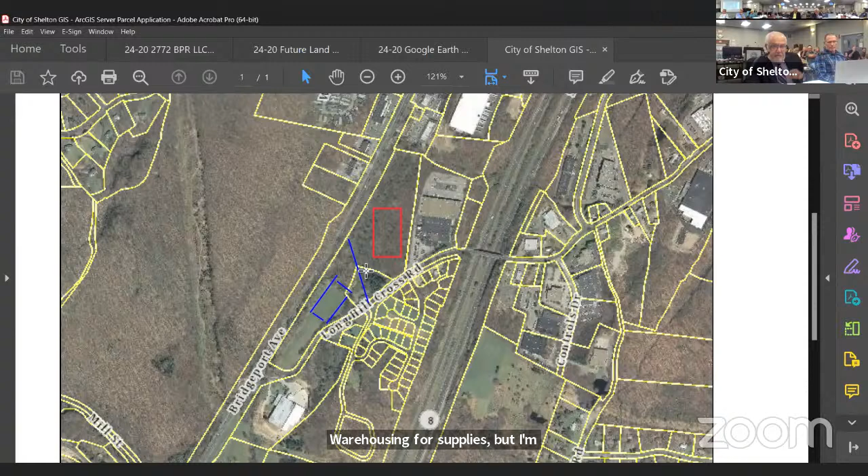That is in LIP, but that's by special exception. This property could be subject, by special exception, to one of the things that people are building, which is high-tech, high bay warehousing for supplies. But I'm not even going there because I'm just focusing on site plans for one specific reason.

Which is people are saying, well, why the heck did he put the BPR suit in? I put the BPR suit in because this was a very controversial case in North Branford that involved a propane storage area. The people objected to it, and they raised a lot of issues about the neighborhood, about the traffic in the neighborhood, and about the land values.

And it was approved because the commission had made it a site plan, which meant it was a matter of right as long as it complied. So I call your attention, and I'm going to quickly go through it, that the language in the headnotes of this case are very enlightening.

When reviewing a site plan development application for a permitted use as of right, the planning commission acts as an administrative agency. When a planning commission undertakes consideration of a site plan application, it has no independent discretion beyond determining whether the plan complies with the site plan regulations.

And then it says the commission, when it's unable to deny it because of the claims of traffic, the claims of the impact on the neighborhoods, because when the Planning and Zoning Commission made it a site plan as a matter of right, it was a determination that the infrastructure in the area and the use is appropriate.

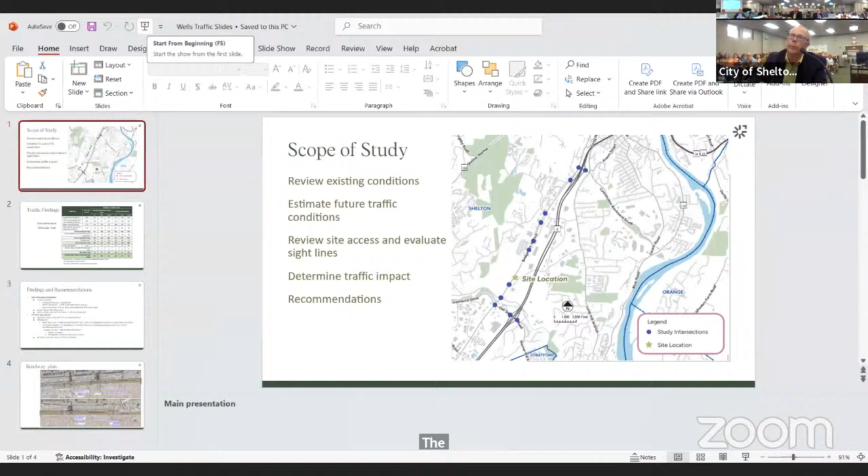If you go to the next one, the next slide. Dominic, if you can get to it. Next slide, on my screen. There we go, there it is.

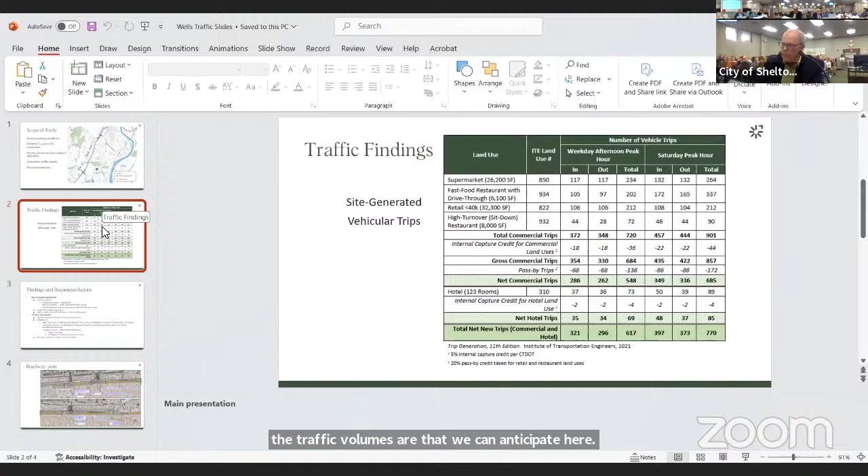This gives us a feeling for what the traffic volumes are that we could anticipate here. There's a lot of numbers up here, but essentially we took each of the land uses individually. We used the Institute of Transportation Engineers statistics for each land use, added up all of those land uses, and for the commercial land uses we take an internal capture, which means somebody going to the restaurant might already be at the hotel, for example, resulting in a small decrease in traffic volumes.

Then a larger decrease is the pass-by trips. Pass-by trips are, for instance, if you're on your way home from work and you stop into the supermarket, then continue on your way home. That's a new trip to that particular driveway, but not a new trip at the other intersections because you'd be going through those intersections anyway. So we make the adjustment for pass-by trips. The hotel doesn't have the pass-by component, so we did that individually.

At the end of the day, we're estimating there'll be 617 trips in an afternoon peak hour, in and out, approximately half and half. Likewise, on Saturdays during the midday peak hour, early afternoon, we expect that number would be higher, about 770 trips. That's our total net new trips that would need to be accommodated on the area roadways.

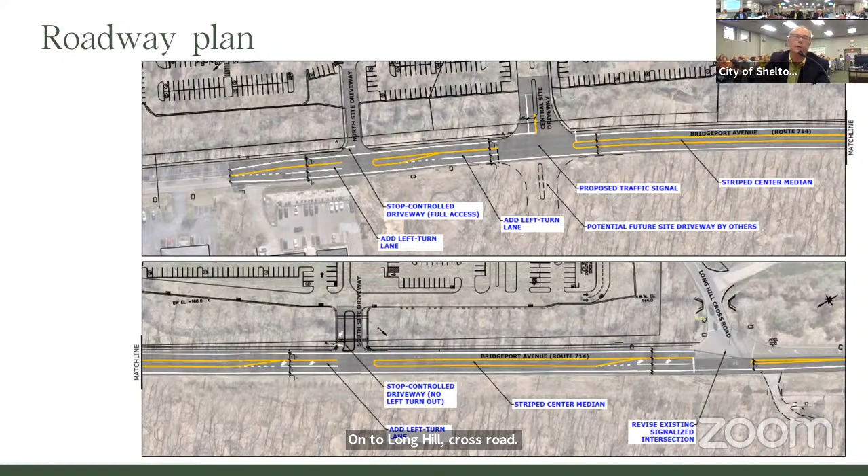So, Dominic, if you can go back one slide. It's a little bit of chicken and egg there. So that's what we're expecting at the site driveways. In general, all those driveways will have good levels of service, and again, as I mentioned, we'll be adding southbound left turn lanes at each of the 3 driveways.

In terms of off-site or non-site frontage mitigation, out of the intersections that we looked at, we found that there's some impacts that should be addressed at 4 of the other intersections. Well, 5, including Long Hill Crossroad, which I already talked about. So the first bullet is that left turn lane onto Long Hill Crossroad off of Bridgeport Avenue southbound.

The second thing was a lane use change at the intersection of Bridgeport Avenue with exit 11, aka exit 13, formerly known as FKA, FKA exit 13. At that location, we did find that our traffic was diminishing the level of service there, and we're recommending a lane use change there.

What we found is the right turn lane onto the ramp is often starved, meaning it's underutilized, and there is a 2-lane acceptance on the other side of the intersection. So our recommendation is to make the northbound approach there a through lane and a through right turn lane, instead of as it operates today with a left turn lane, a through lane, and a dedicated right turn lane. So we'll get dual use out of that right turn lane.

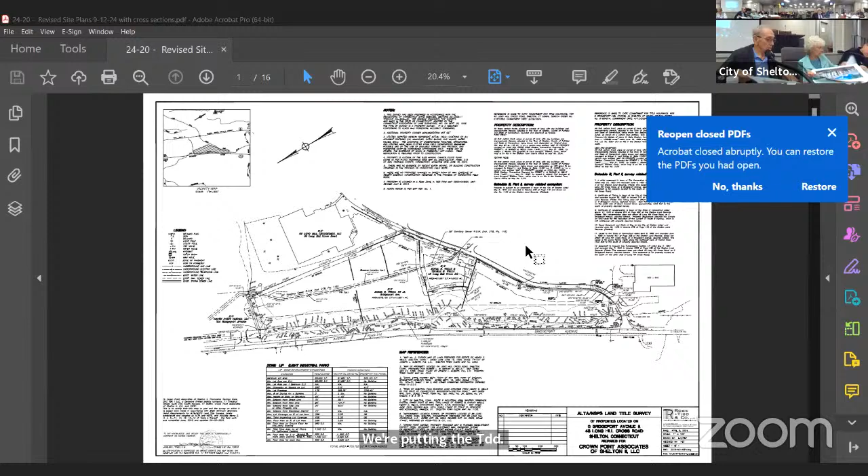I see where it says relocate sewer line and easement—what was that wall, is it all the way to the back? No, the wall is in front of where that sewer line is shown. It's the back of the development, basically. That's the retaining wall, is it that black line? Oh, okay, correct.

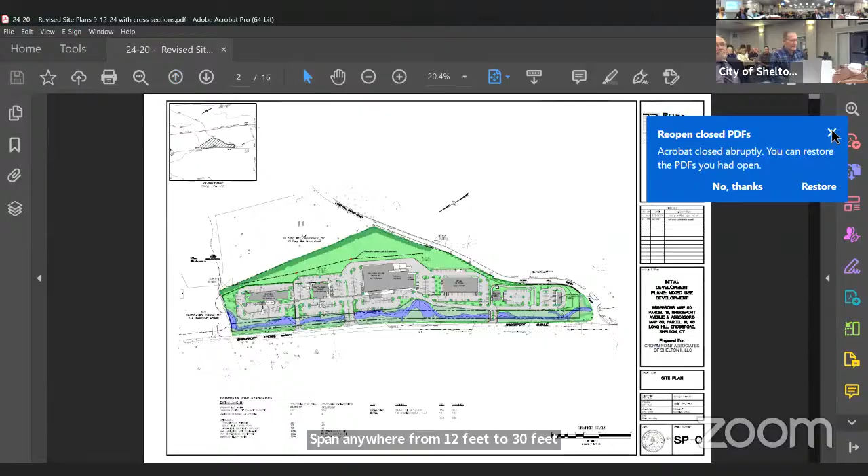So because there's a big grade change, we are having to create a plateau. We're going to come in on the elevation of Bridgeport Avenue, span across going uphill to a higher elevation on the other side of the brook, then go back essentially at 5% to create a pad for this development that will give us retaining walls at the back, which will span anywhere from 12 to 30 feet in height. So compared to what's existing behind the Y right now, what's the perspective? Creek-wise, probably 25, 28 feet. Okay, so it's a similar nature of height.

But it varies—as you come down Long Hill Crossroads, it eventually goes to zero, and then actually there's a situation above at the corner. So what we end up having to do is create a gravity retaining wall along the brook to create our parking for those pad sites. And then to the rear of the development, it will be either a rock face or a gravity retaining wall, depending on the condition of the rock.

What's gravity? I don't know what that is. Large masonry blocks that are stacked, with filter fabric that runs back into the grade to hold them, keep them stable. So are they sloped? They're straight, battered back at a fairly slight angle. Okay, so gravity is keeping them—that's why it's called a gravity wall. So are you taking product out and then putting product back in, in other words, making it level? We're making it relatively level.

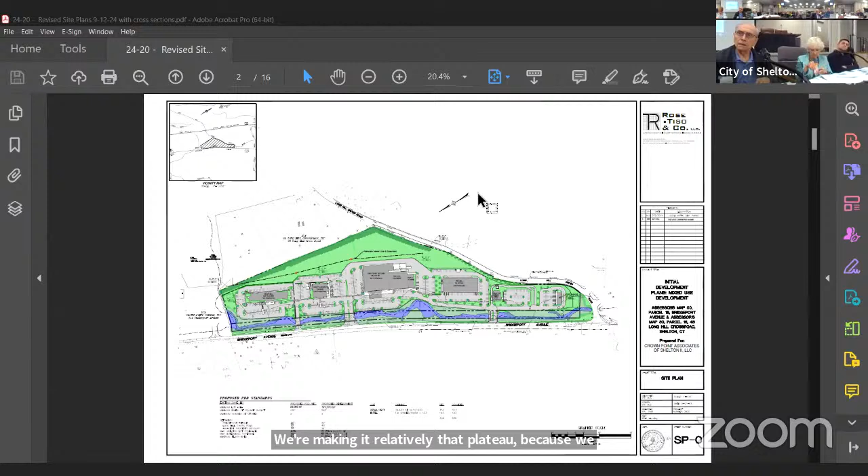That plateau—we can slope it 5% across parking, where driveways can be more than that, but it has to be relatively level. But the problem is, with the challenge of the site, is that from the north end down to the south end of the site, there's a significant grade change down. From what to what?

You want Mr. Silva to take care of that when he's up? Yeah. Okay, but we'll hold on to that right now. It's, you're up in the north end at 190, and down at the south end at 160, so you're 30 feet down—you've got 2,200 lineal feet to go 30 feet. But you're also fighting the fact that you want parking level in front of the store, and the parking lot can only change like 5%, so you have to balance that.

Okay, regarding the aesthetics of this gravity retaining wall, is the appearance of it what they've put up so far at McDonald's, in the corner there?

I haven't seen that one. You can get different faces on the gravity retaining wall. They can be made to look like masonry blocks, or brick. There's all kinds of faces you could use. And there's most likely some landscaping in front of it, just softening.

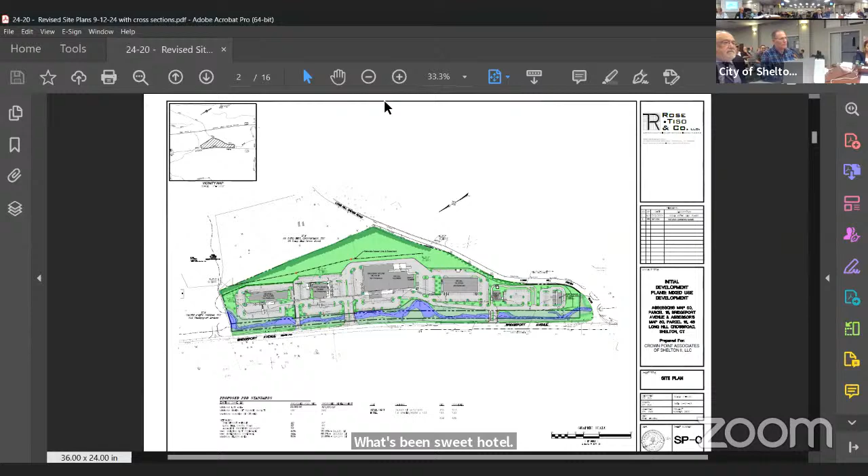Yeah, I'm trying to get it up a little bigger. So that is access off of the most northerly bridge. Turn left into the hotel. Then to the right-hand side as you come in, there will be a Texas Roadhouse Restaurant.

Which is a little less than 8,000 square feet and has 152 parking spaces. Then that brings us to the center entrance to the center. On the right-hand side of that, there's going to be a grocery facility, about 25,000 square feet, and adjacent to that about 16,600 square feet of retail space right next to it, servicing that with about 187 parking spaces.

Is this a particular grocery? There is discussions with a particular grocery. Okay, I mean some that I know have huge demand of parking. Yeah, that would be a concern.

Backing up just a bit, are you going to be able to give us some elevation drawings? I have renderings here. Yeah, we have renderings. No, I mean of the site, these retaining walls. You can actually see in some of the renderings where the retaining wall is behind. I haven't done one yet that shows the one along Spring because we haven't done the vacation.

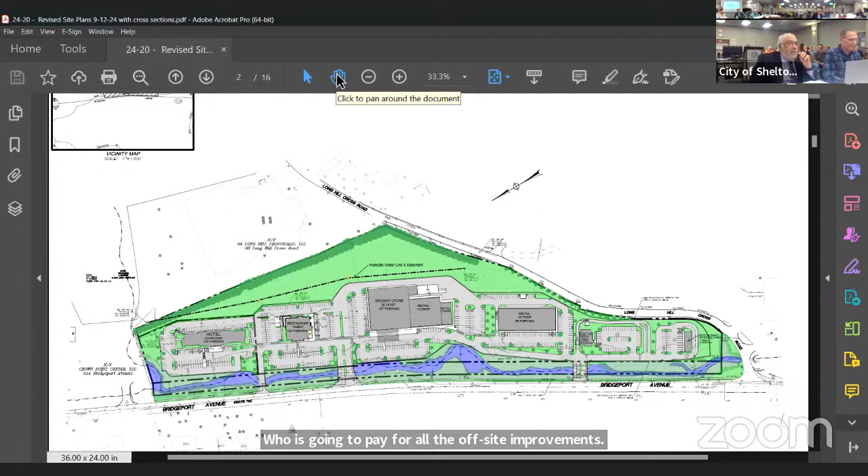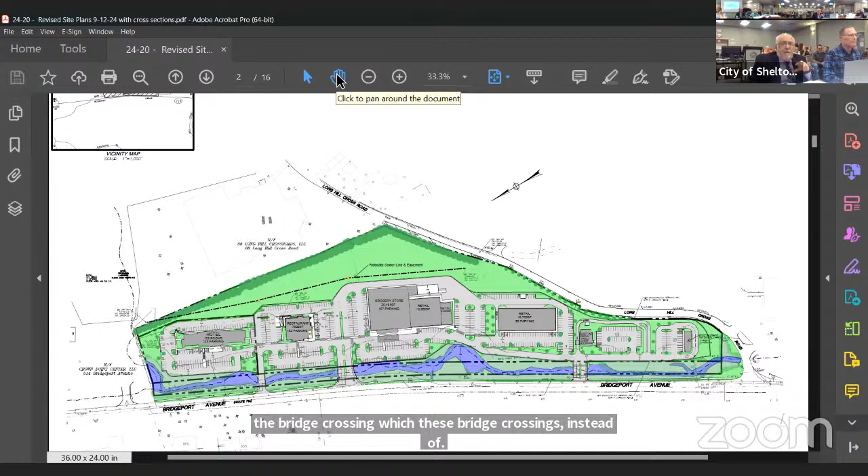Because of what you asked at the end of Dave Sullivan's presentation, which was who's going to pay for all the off-site improvements? It's the developer. So when you look at this site and the issues with it, you have a retaining wall in the back, a wall in the front as you go in, and the issues that have to be dealt with of the bridge crossings. It would be less expensive to drop a culvert in, but the wetlands don't want culverts, they want bridges. So all of these things are extremely expensive. The public often says, well, all the developer wants to do is make money. I've been doing this, at least the land use portion of it, for almost 40 years now, and I have never represented a developer who told me he or she did not want to make money.

That's what they're in it for. They're doing that. The problem is that they're not in it to launder drug money. They're in it to make appropriate money and pay for the costs, the improvements, and the site development.

When you're on Bridgeport Avenue, I tell everybody that walks into my office, you have to have a conversation with the person who sat next to me, Dave Sullivan, and find out what you're going to have to do offsite, because you have to pay for it. And when I was first told what a traffic light cost, it was mind boggling.

So in other words, the developer sets it up looking at what the potential tenancies are. The hotel is obviously not a tenancy, the hotel actually buys the property, because as you're familiar with the other ones you've approved, the hotels buy it. The rest of the rental income needs to support the development.

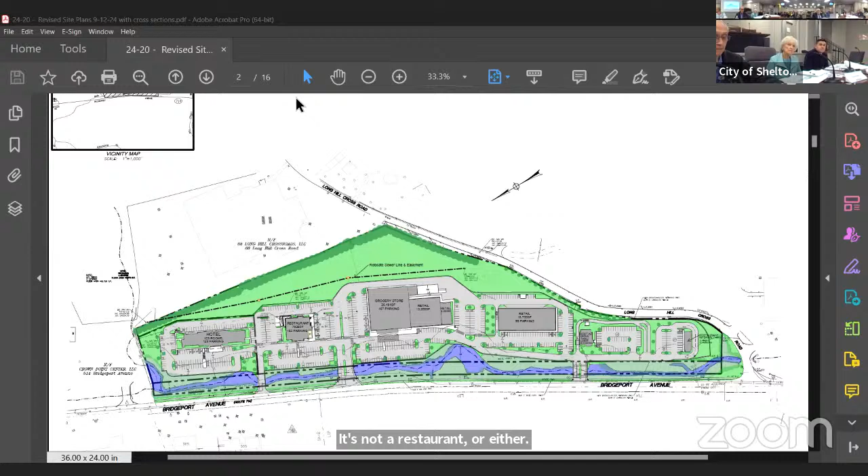But it's not a restaurant or eatery - it is an eatery, food related. So three drive-throughs. Yeah, the one restaurant that has the drive-through with the 48 spaces hasn't been assigned yet. Nobody's leased it or talked about leasing it.

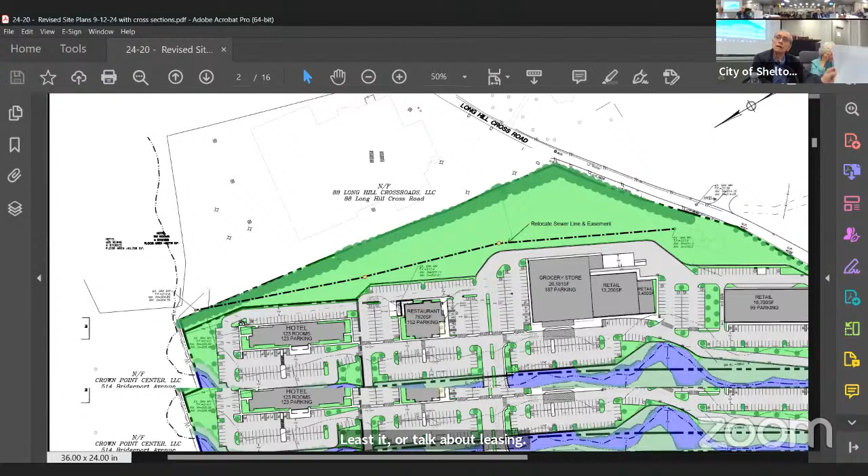People love the Texas drive-through. Would Roadhouse have a pickup area? Yes, they have pickup spots, such as Outback. Okay, yes.

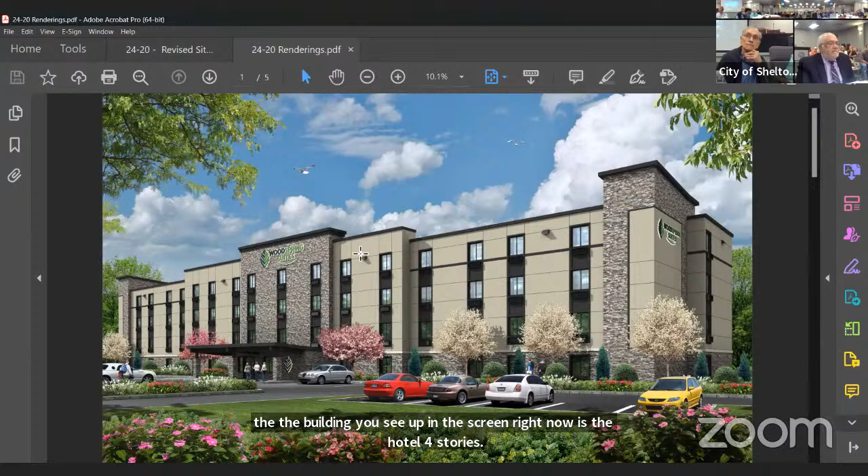So the building you see on the screen right now is the hotel. It's 4 stories, a WoodSpring Suites Hotel. What we've done is put a cultured stone base, front entrance is cultured stone with a canopy, porte cochere. On either end you've got stairways, also cultured stone, facing the street. Then it's EIFS on the 4 stories above, with black windows and black metal panels, where the windows are for each of the hotel rooms. It's a really standard hotel layout, but I think when you see the rest of it, you'll see that it all fits together to some degree.

Are you going over the actual layouts later on? I can, but the hotel is fairly straightforward, it's 123 rooms. There's no large gathering spaces in it, other than lounge areas. So unlike the Courtyard by Marriott down the street, no indoor pool, no ballroom, no meeting room, none of those things. It's just strictly a bedroom kind of setup, suite type, like extended stay type.

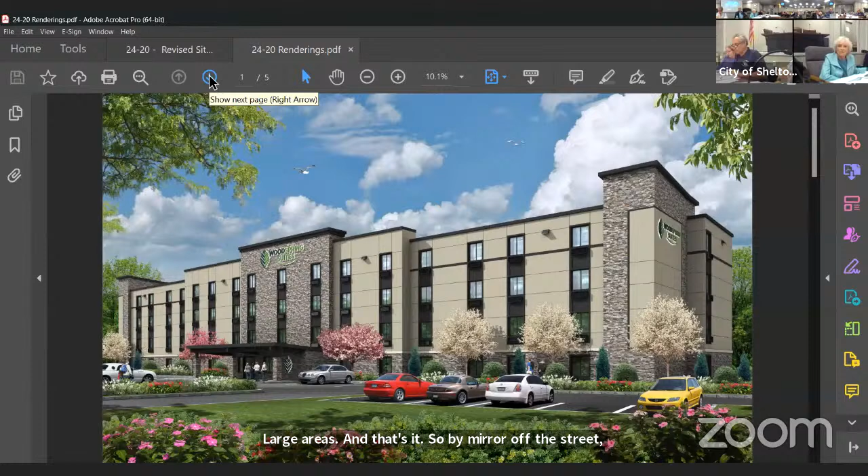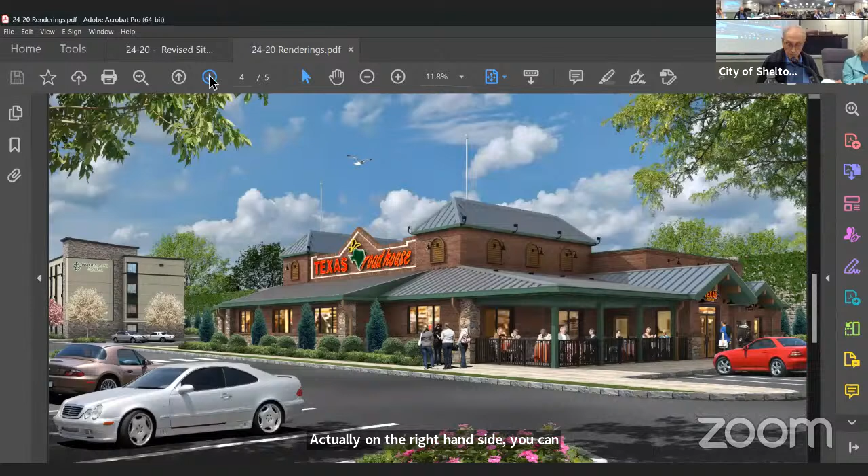That's good. Texas. Very nice. So we keep going. Okay. Next one is the Texas Roadhouse. You can see the hotel on the left-hand side. Actually, on the right-hand side, you can see in part of the rendering the gravity retaining wall above, with the road here. Yeah, see that?

So it's the height of the main roof of the building there. Texas Roadhouse is one of their prototypes. We changed it to some degree by putting all brick on the outside, didn't want to go with the barn board plank, and using the metal roofs, which is their pretty typical standard. It's got a patio area out front by that entrance, which is on the side. Everybody's seen what Texas Roadhouse is, I'm sure.

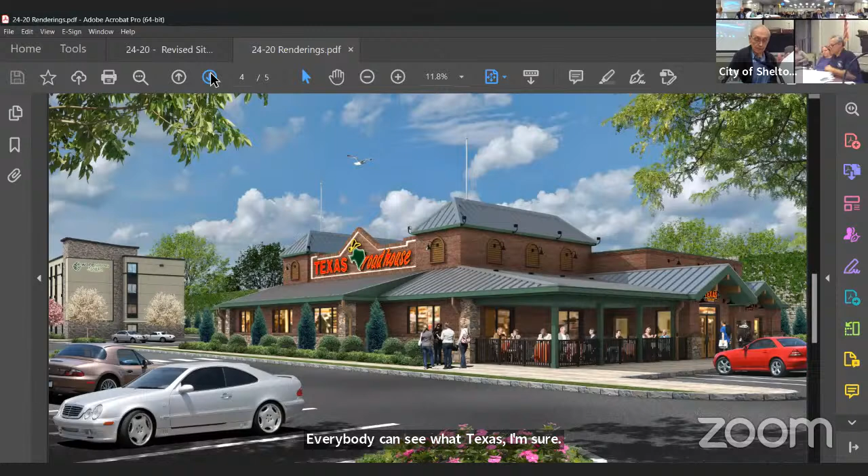Okay, the next one, groceries? The grocer building, where we have the 26,000 square foot grocer on the right-hand side, and on the left-hand side the 13,200 square foot of retail space adjacent to that. For the grocer, we're using a black metal colonnade that runs to protect people as they're walking out with their carts. On the right-hand side you've got EFIS columns, the same columns we're using in the retail, so we're tying those buildings together, so it works fairly well. Gives them their identity with the wood portion—that's the identity of the tenant that's coming in.

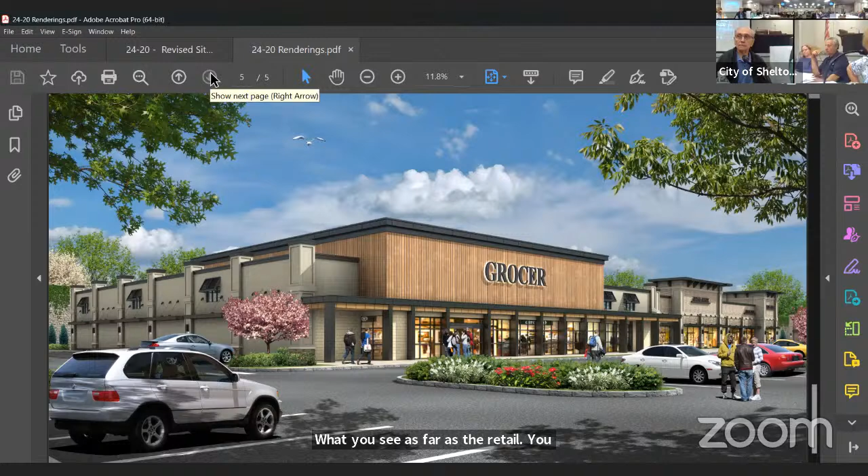Using earth tones throughout? Yes, right. So what you see as far as the retail, you see these EFIS columns, you see the brick inlays above the windows, and you see the black awnings hung below that, and towers that offset the higher portions. They're done in metal.

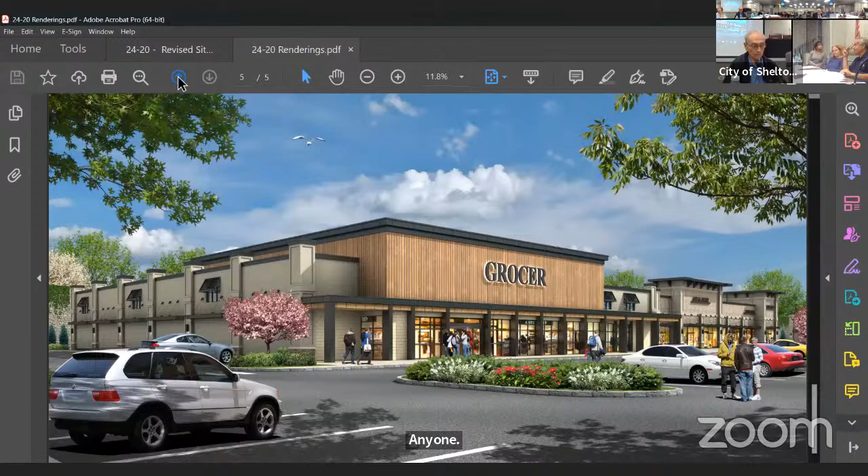Go to the next slide. The retail building that's by itself, the 18,700 square foot retail building, is done in the same motif as the other retail. You've got stone on the base to protect the bottom of the columns, EFIS columns above that, and then brick in between the EFIS columns, black window mullions and black awnings, and black towers that offset and provide some vertical breakup of the length of the building. You're also seeing in this rendering on the right-hand side the gravity stone retaining wall.

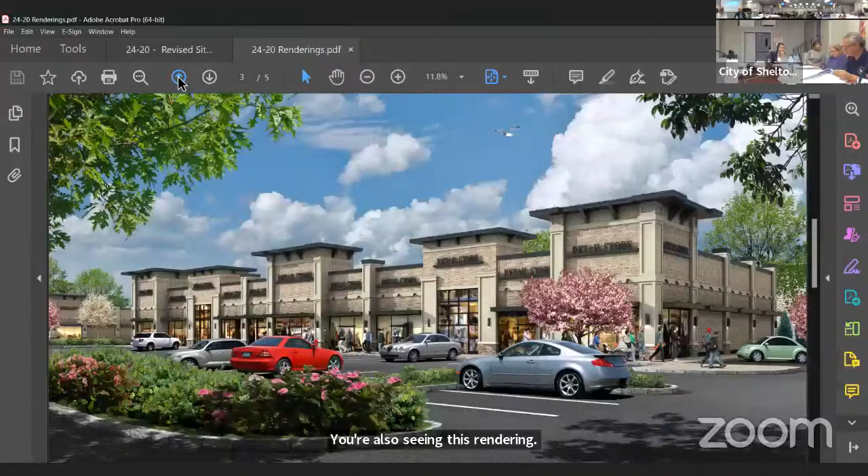And the last one, Dairy Queen. What you're seeing here is the Dairy Queen face that's facing Bridgeport Avenue. This is their typical prototypical building, using EFIS on most of the surfaces, except they have these metal awnings, little pop-out awnings above the windows. Where the DQ sign is, on the side facing Bridgeport Avenue, that's all metal panels, so it's a different material that stands out where the signage is. The signage is only on this particular side, over the front door—nothing around the corner.

That would face the parking lot. I do explain to the tenants that they have to go before the sign subcommittee. Correct, yes, I know that. Their typical sign is only over the entrance that's off of the patio and the entrance on the main entrance. We do appreciate that, but sometimes things slip through the cracks, and not everybody listens to me. Outside of the marketplace where Big Y is, there's a sign saying coming soon for Buffalo Wild Wings. They didn't approach us to get permission to put it up. So we try to make sure that everybody dots their i's and crosses their t's.

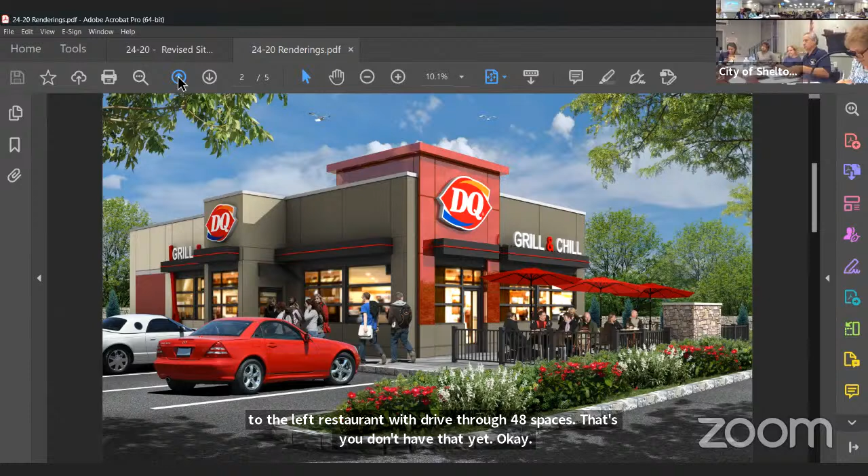All right, very good. Anything else? No, I'd like to let Manny Silva go through the site.

You guys want me to sit down or you want me to stand up like I usually do? Up to you. Please, that's right, in front of a microphone. Yeah, that's fine, we'll grab this one, right? I don't know about the other one. All right, can I steal your mouse though? Yeah, I already did.

Good evening, Manny Silva from Rose Tiso & Company, licensed civil engineer for Rose Tiso & Company at 35 Redwood Avenue, Fairfield, Connecticut, representing the applicant.

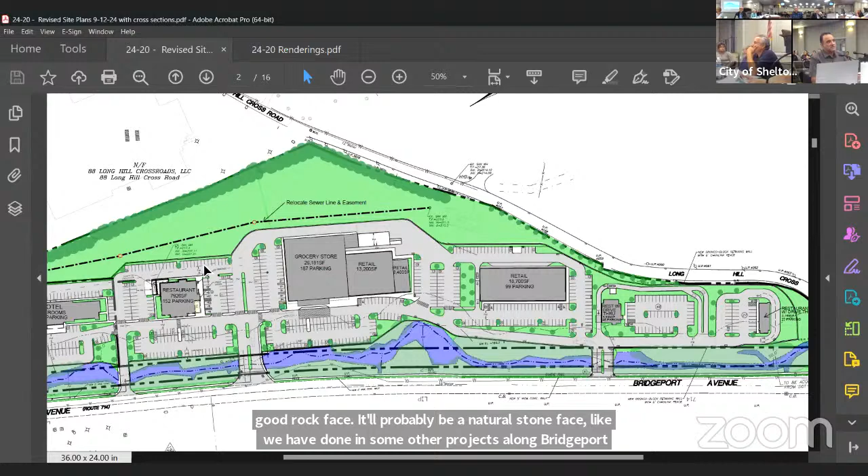To go through the overview of the site again, the site itself will have a small retaining wall along the brook here, which is going to be similar to what is at Fountain Square, a stone-faced concrete wall. And then similar to the marketplace where Big Y is, the rear wall, is how that's going to be. If we run into a good rock face, it'll probably be a natural stone face like we have done in some other projects along Bridgeport Avenue.

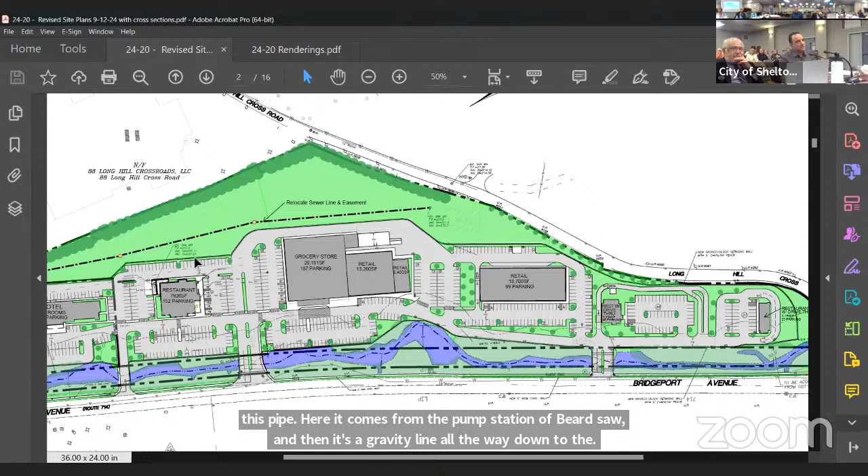But if that does not pan out and that's mostly soil, it will be a similar retaining wall to what's behind Big Y. We have, again, a sewer relocation here, and then this pipe comes from the pump station at Beard Saw, and it's a gravity line all the way down to the pump station in front of Crown Point, and we'll be relocating that a little further back. Again, just to reiterate, this line here that follows the retaining wall is the limit of the PDD. So only this black line where the retaining wall is towards Bridgeport Avenue will be PDD. The rest of it will remain LIP.

The site, as Pat said - it'll remain LIP or something, right? Yes, okay. And again, as Pat and Attorney Thomas illustrated, there's going to be 3 bridges crossing the brook into Bridgeport Avenue.

There is no access onto Long Hill Crossroads. In fact, Long Hill Crossroads will sit a little higher than the site itself, so I have a couple of sections that will show that even if there were no trees whatsoever in this upper area - which we are going to have buffered and landscaped on both the backside - but if there were no trees at all, you could see from Hawks Ridge or Long Hill Crossroads basically the top of the roofs.

But that's not preferable - that would not be preferable. Right, so that's why we're going to have landscaping and buffering along Long Hill Crossroads, so that you won't be able to see the top of the roofs.

The bridges themselves are conspan bridges, which are like precast half-moons that will span the brook without actually impacting the brook itself, so there'll be free flow underneath it. The footings and everything will be outside of the brook area.

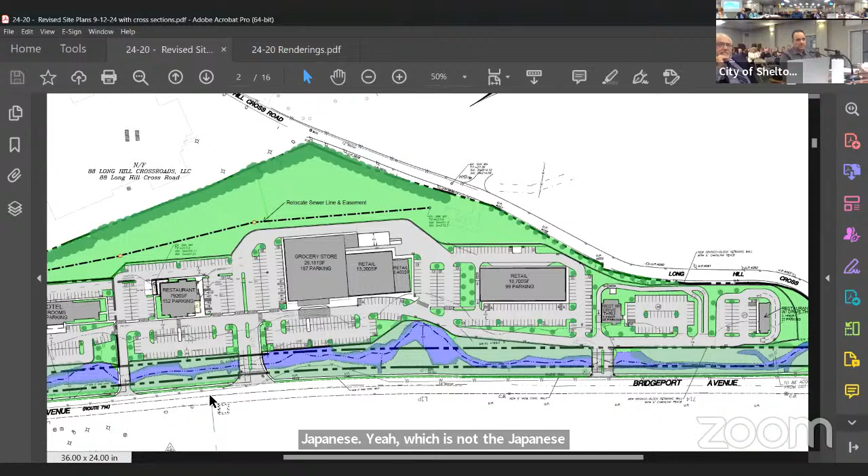Then you'll see these side pieces of dark concrete where the sidewalk and guardrails will be. It's very similar to what was built in front of what was historically called Madison's, now the Japanese steakhouse. That's exactly the type of bridge we'll be putting in, to reduce the impact to the brook and have free flow for any kind of animal life or water flow through the brook.

As Pat said, the site generally slopes from the top of the page here down to the brook below. It's a very steep grade. It doesn't look it from Bridgeport Avenue, but if you were actually on site, you'd see it's a pretty good climb to get up there. The reason it's kind of an optical illusion is because part of it is cleared, where there was a meadow on the right-hand side, and the meadow makes you think it's flat, but it's not really flat.

In fact, Bridgeport Avenue itself has a pretty good pitch going from north to south, diving down quite a bit. So we have to create plateaus - the hotel site, then about 5% down to the next site, then 5% down again, with a flat area for each site. So you'll see it step down with the natural grade.

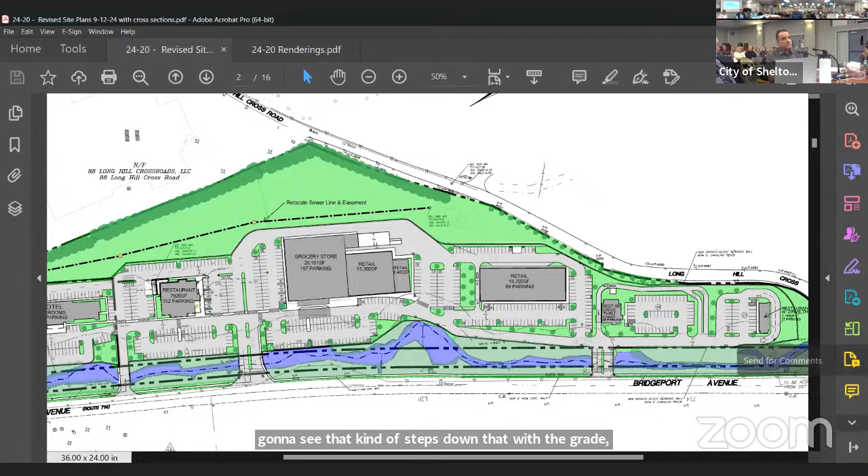That's fine. Here again, we have that area that's going to remain LIP - I should write that - and the area that's going to be PDD is down there. I want to clarify one thing: the PDD area does not include, at this point, the 50-foot state property, because I couldn't include it. If the state property is sold to us, I'd have to come back to amend the boundary of the PDD. Right now, all of it is typical right of way. I just wanted to make sure you understood that.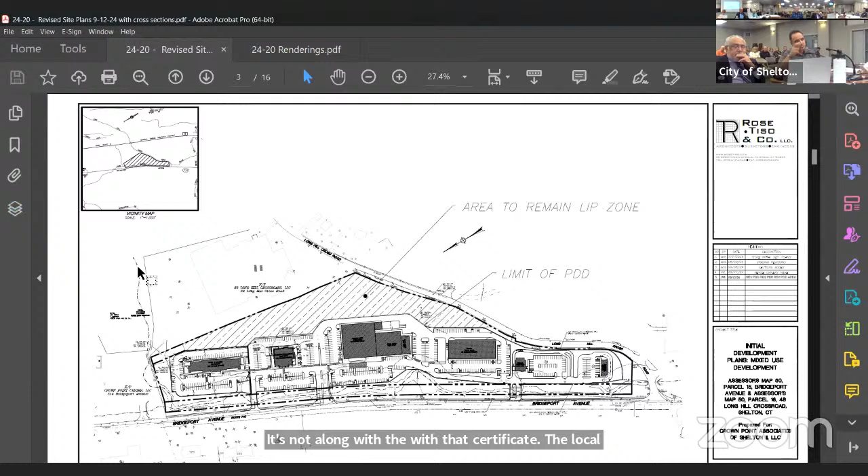So with the state right of way, if we acquire that property, it's just an encroachment permit on the state right of way to do the improvements we're asking for. Along with that OSTA certificate, the local district will review the encroachment, meaning creating driveways onto the state property, which we'd be allowed to do, and then removed.

Well, it's Crown Point the same way, isn't it? Correct, all the sites on Bridgeport Avenue are the same - they all have to have a DOT approval with an encroachment permit to access the state right of way or state road from our property. We don't see any issue with these three proposed bridges onto Bridgeport Avenue because it doesn't have a non-access line or anything like that, so the state should allow it, along with Dave's help.

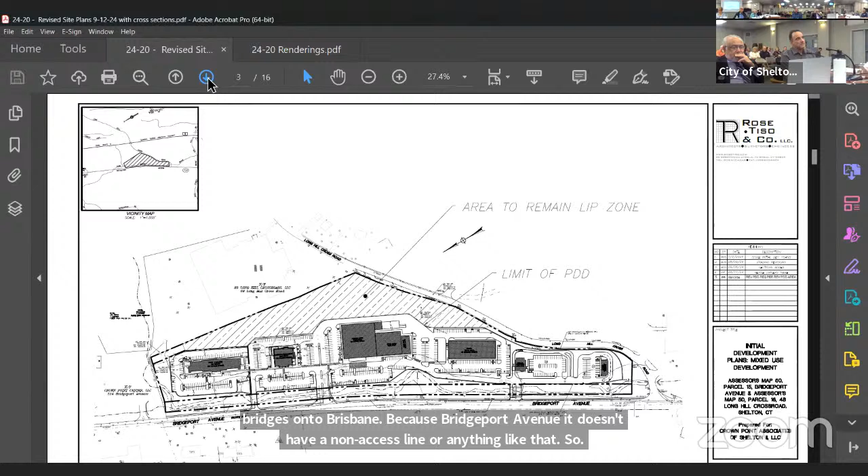What's a non-access line? A non-access line is like along Route 8 - you couldn't put a driveway onto Route 8 because that's a non-access line. You can't cross that with any kind of driveway, even if you own land adjacent to it. There are non-access lines even on state roads, like at Old Stratford Road near the ramps, where Split Rock's property is - that's a non-access line. Even if Split Rock wanted to bring a driveway close to that entrance ramp, they couldn't, because you cannot cross that line. That's what a non-access line is.

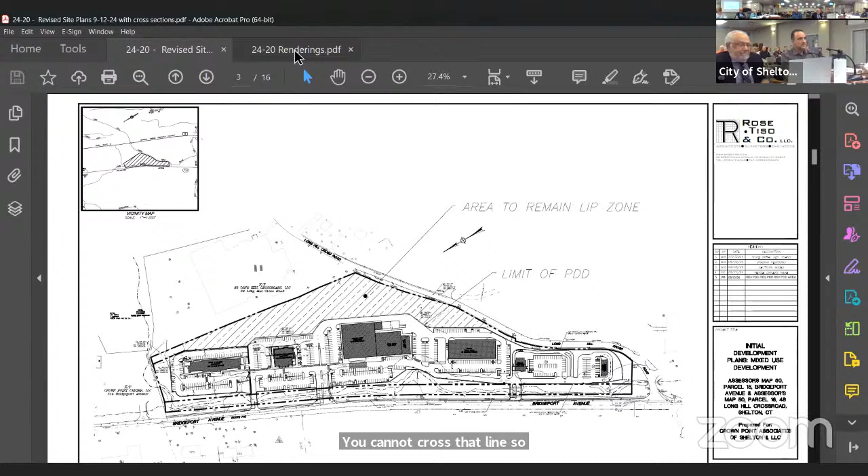Of course, the attorney can correct me if I'm wrong.

Well, I won't even tell you what it costs the people at the convenience store and gas station that you approved. There's a non-access line, and I don't even want to tell you what it costs them for a 5-foot access.

Keep going. I know you wanted to say something. No, take your time, do what you have to say. It's just... okay, get to the point.

And then here in front of the grocer, we have a whole striped area. That's a crosswalk, a different texture, so people know not to go zipping through here because there's going to be people coming out of the grocery. The surface of the road is a different texture? Yeah, it's going to be striped and stamped, like an epoxy paint that looks like brick. So is it a little bumpy? Yes, so that you know you've gone into a different area and you better pay attention.

Has that been done? Yeah, Quarry Walk. Or we walk over? Okay, go ahead, there's other ones. Yeah, that's a good one.

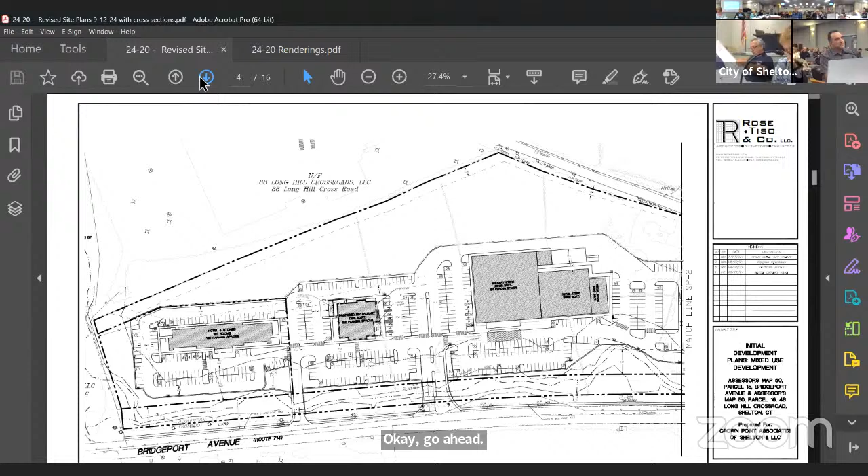So again, as we go down here, you can see this is the gravity block wall section. It's like Lego blocks. This will have a face on it with stone similar to what's going on at Fountain Square.

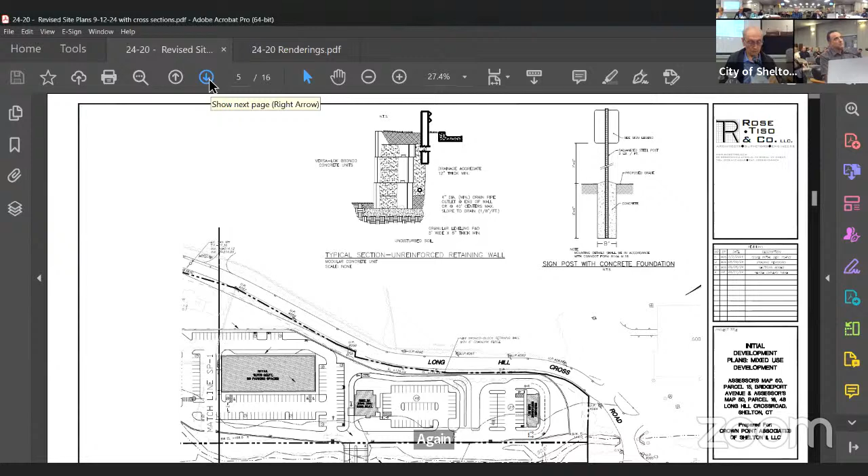We're probably going to pour a lot of it because of the adjacency to the wetlands, just to reduce our impact. Now here's the fun stuff that you guys like to talk about.

The drainage. Because the site is plateaus coming from the back area forward, all the areas are going to be sloping towards Bridgeport Avenue and then be collected in various pipes and catch basins. The drainage on this site is divided into 3 sections. Area 1 is right here, and that's going to have its own underground gallery system with a vortex unit, which is part of our treatment train.

We're going to collect the water into the various catch basins with hoods in them to collect all the floatables and any kind of bottles or oil inside the catch basins themselves. As the water runs down, it's going to go through a vortex unit, which will swirl the water around, slow it down, and get any suspended solids or small particles being washed away in the water to the bottom of that unit. Any oils and floatables will also get trapped in the top ring of it.

From there, it'll go into an underground gallery system, which is a concrete structure, basically an open bottom tank that holds all the water, filling up based on the control structure, which is like a wall with a little hole in the bottom. It'll fill up with water and percolate into the ground slowly, filtering it before it hits the groundwater. And then from the groundwater, it will work its way over to the brook area.

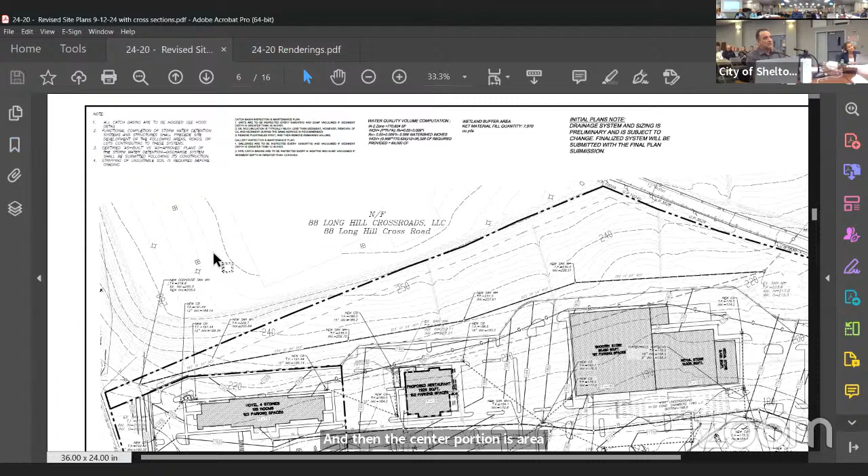So again, there are 3 systems. There's one here, and the center portion is area number 2. Let me get the cursor... Yeah, got it. And here in this area, this is partially area number 2, the back end of it. And then this is area number 3.

In area number 1, we have a reduction at the 2-year storm of about 365%, so we're reducing it by 3 times. The 10-year storm is about 400%, 4 times. The 25-year storm is a 129% reduction. The 50-year storm is about 57% reduction. At the 100-year storm, we're reducing it by 18%. So all the way from the 2-year to the 100-year storm—which is about 7 to 7.5 inches of rain—we're reducing it in area 1.

Area 2, at the 100-year storm, we have a 40% reduction. Area 3 ranges from 50% at the 25-year storm down to a 1.5% reduction at the 100-year storm, and that's because it's a smaller area—just these 2 end caps here that are in that drainage area.

During construction, we also have to control any kind of sediment or anything coming off the site.

There's a lag. And now.

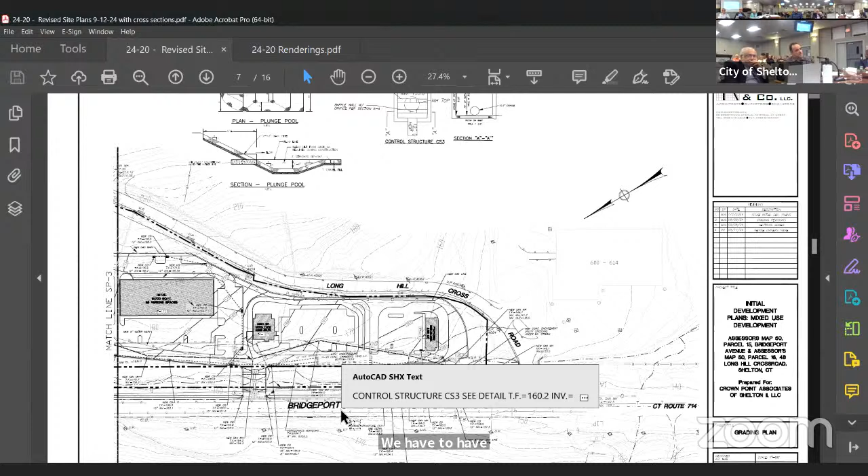During construction, we have to have soil erosion controls on site that are mandated by the state of Connecticut. On this site, along the brook, we'll have silt fence with hay bales behind it to structurally hold up the silt fence, stopping any sediment or mud during construction from entering the brook.

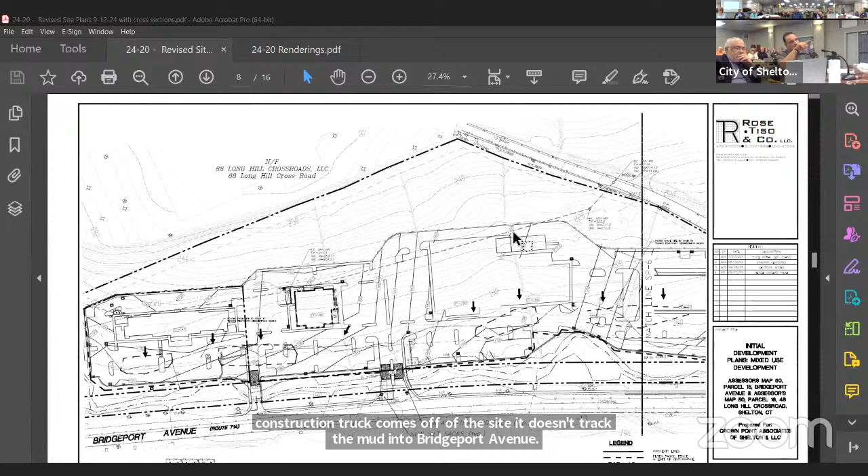We'll also have a construction entrance, which is a riprap stone pad at the entrance, so that when construction trucks leave the site, they don't track mud into Bridgeport Avenue. Around the backside and in the catch basin areas, we'll have silt sacks so that if water goes into the basins, any mud or sediment gets caught in that sack. Once construction is completed with pavement and the area stabilized with landscaping, we'll pull those sacks out, and it'll be a clean unit ready to go on day one.

Hopefully that's this side, and once it catches up, you'll see that we have the same amount of soil erosion controls on the next property, or the other side of the property there.

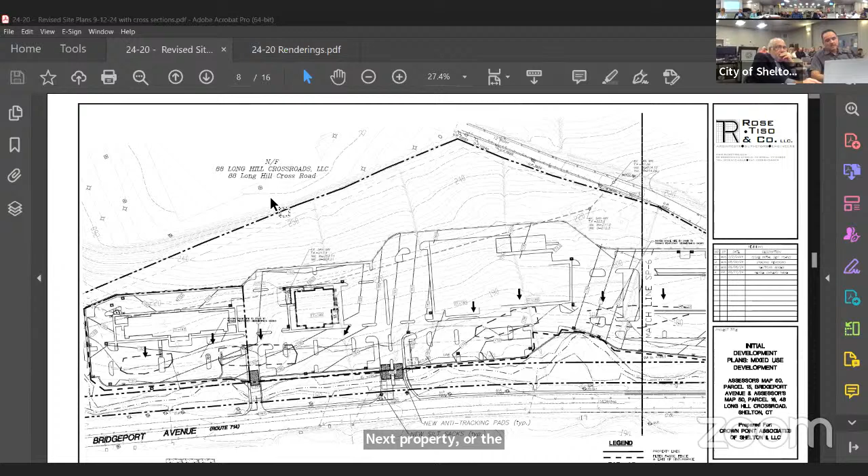I think you're lagging. You're lagging. Yeah, the zoom. And then let's go to the detail.

Is there a landscape plan already? There's the landscape plan. Yeah, so we also have a landscape plan, which is ornamental landscaping.

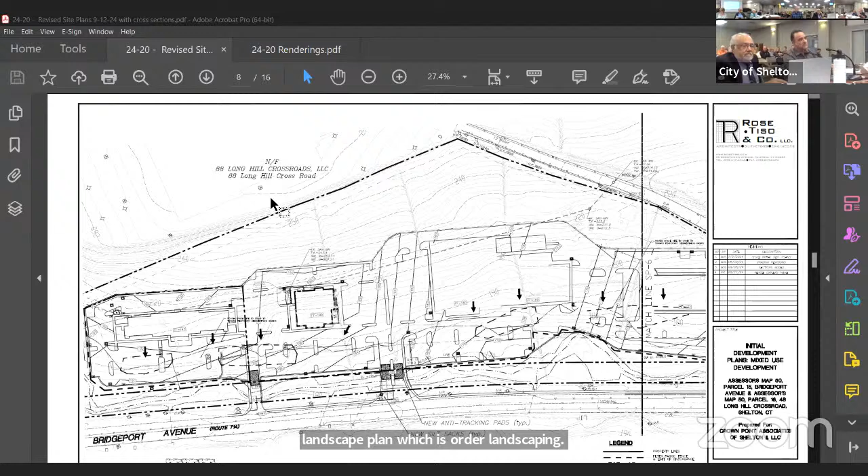It's going to be on all the islands, at least 2 trees per island with some ground cover. Hopefully once we get reconnected with the Zoom, you can see it.

Is there a list? Yeah, can you just put up the SP? Mr. Silva, does it include a list of plantings?

There's the list of plantings on there, and we tried to make them all native to keep the commission happy. Don't try, oh, we will. I don't want anything thrown at me. You can do it, oh, we will. We will have all confidence. We don't have any.

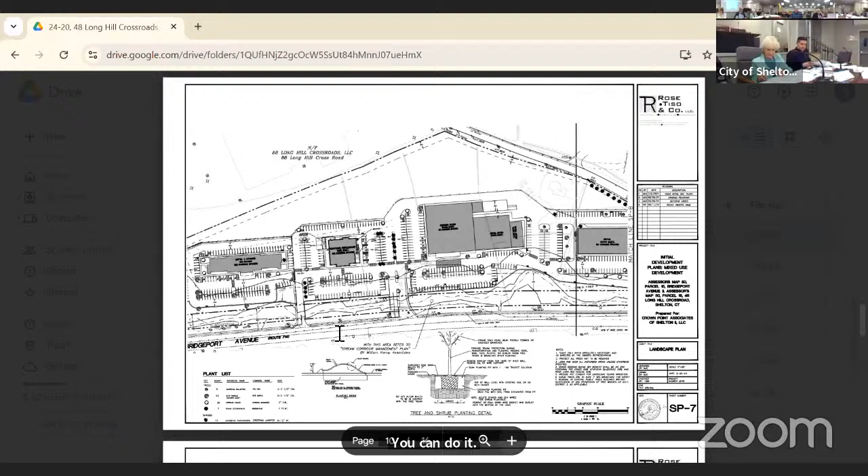So there's the landscaping plan, as you can see here. I have it sorted up there. Thanks, though, but keep that. You don't even get it. Oh, that's the one? Okay, she's doing such a great job, huh? She gets thrown into this.

So we have ornamental landscaping in all the islands here, and then what we have is a buffer area.

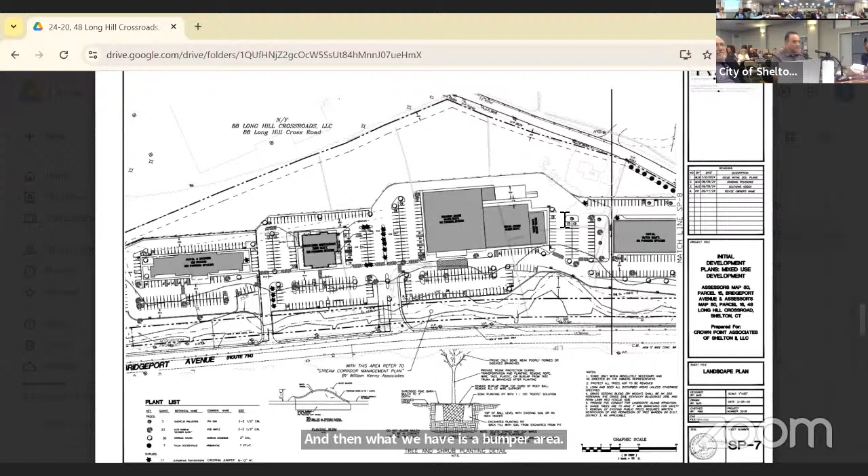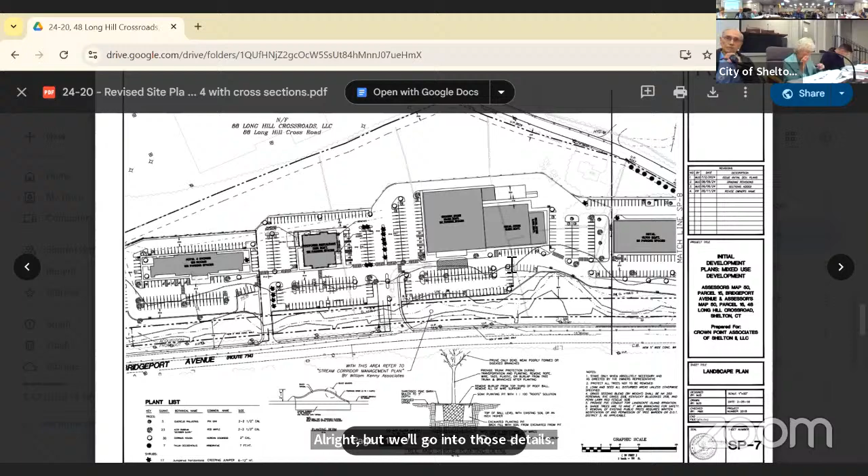Forget the Cornus Kousa right off the bat. I know, you want the American, not the Korean. All right, got it. But we'll go into those details. I promise I'll have that worked out for the next meeting, or for when we do the detailed development.

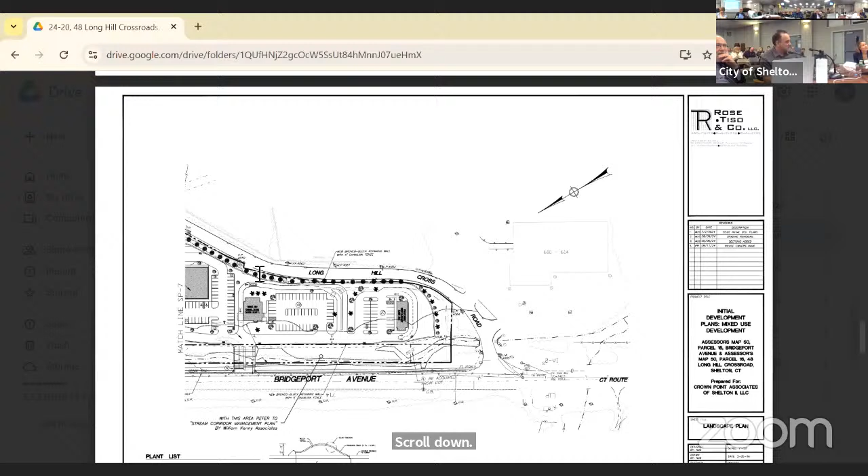Scroll down. Okay, so then here you'll see that we have the arborvitae hedge that's on top of along Long Hill Crossroads. You see all these little dots, but they'll hedge together.

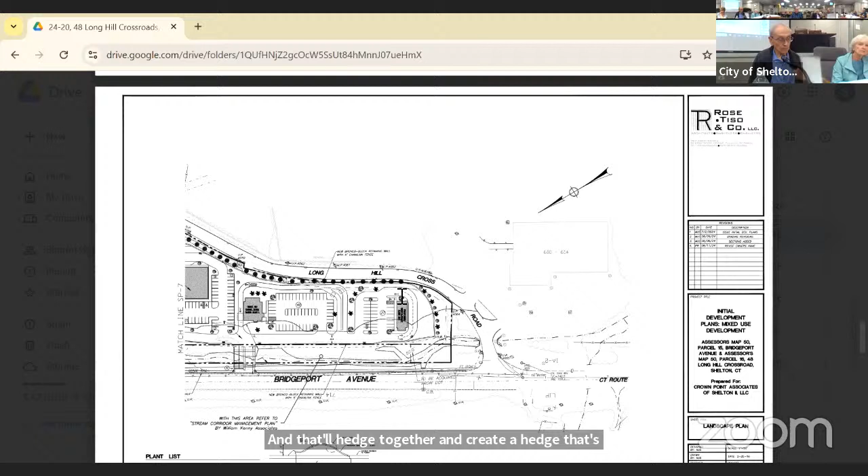We can actually use something that's a little more deer resistant. Yeah, right, we'll put that in instead. That will hedge together and create a hedge that's about 40 feet once fully developed. How long does that take? They're pretty quick, as long as we water them, they grow very fast. It's going to start like 10 feet tall.

What are you proposing for that? I think the alternative for arborvitae is a type of spruce tree, or juniper, something juniper. It's similar to arborvitae, but a little darker green, and deer don't like it because it's a little bitter to them. Otherwise with the arborvitaes, they'll eat the bottoms of them, making big cones at the top.

Maybe we could split them, only because we get criticized a lot that deer have no place to go and eat. Yeah, so we can alternate them, I guess, to give them something to eat. But the hedge here will start off around 10 foot high, as individual plants, then grow to about 40 feet at some point, usually within 5 years.

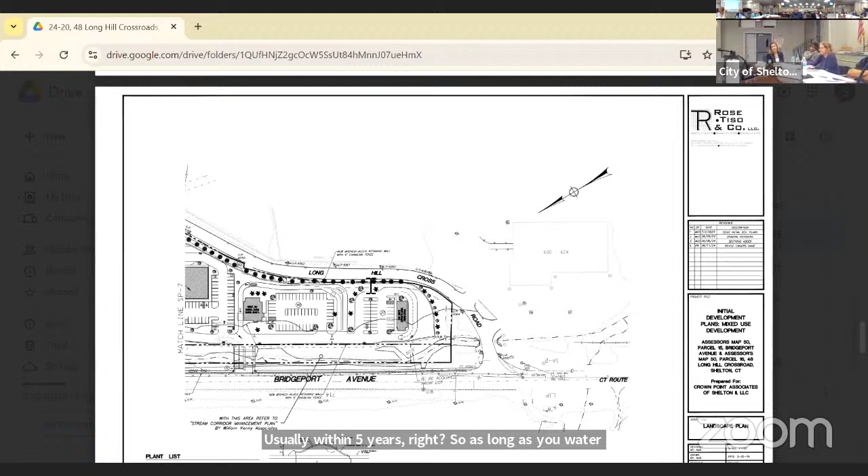As long as you water them, they're very water dependent. They want a lot of water, but they'll grow quickly. And they'll hedge together. We can even cut them so that they hedge together in a different shape.

Irrigation for them? They're going to have drip irrigation. So that'll create almost like a 40-foot green wall there along the property.

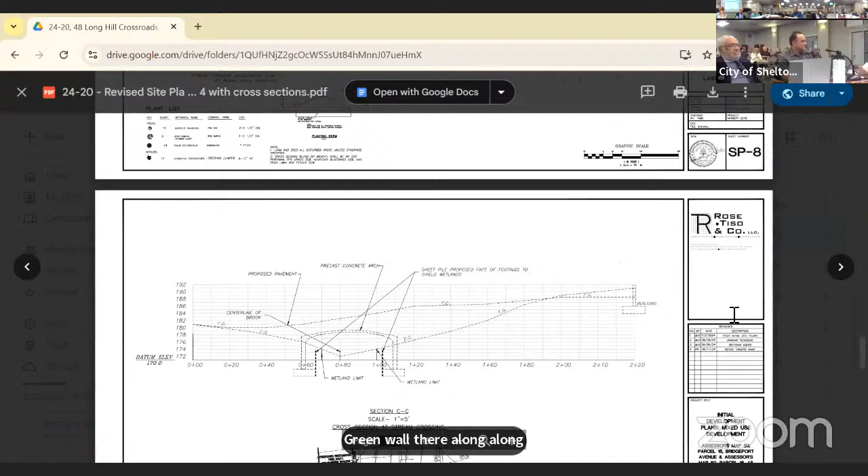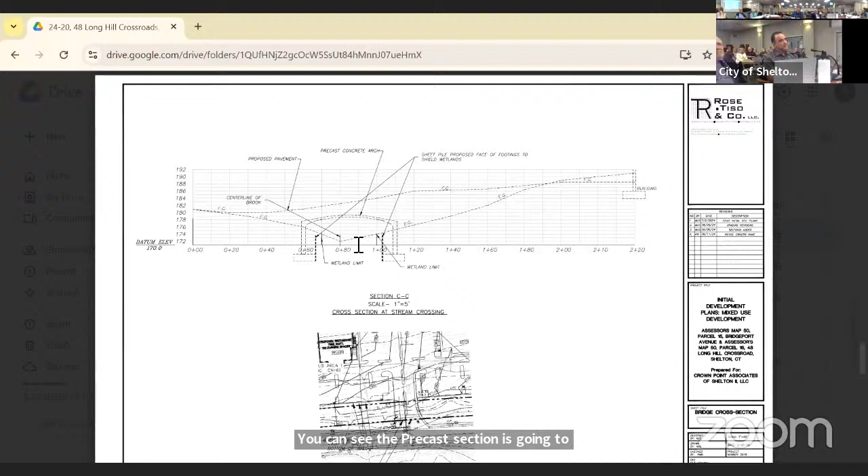Here's how the con-span bridge will work in this section. You can see the precast section is going to be over the actual brook bed, and that doesn't impact the brook bed at all. It just flows right underneath.

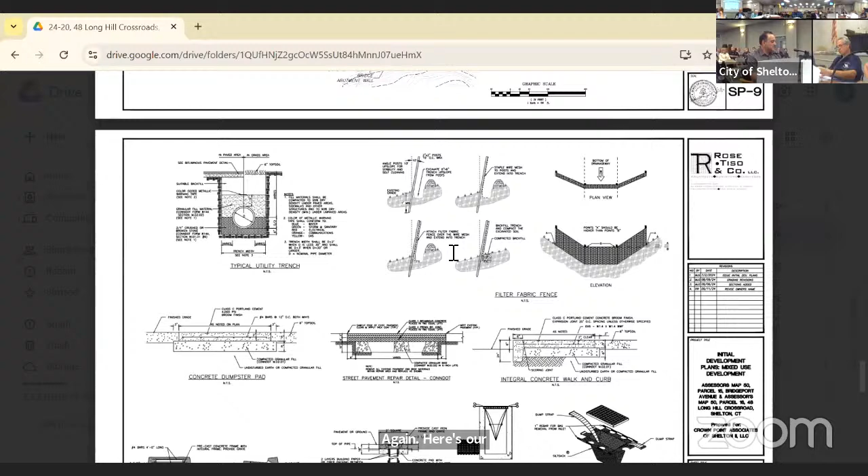Here are our details of the silt fence. That's a silt fence that's unreinforced, and that'll be on the high side. There's the silt sack detail, which catches sediment during construction. And then we have the snouts that go inside the catch basins themselves. You can see how it holds the floatables and garbage inside the catch basin, and the water just siphons up underneath.

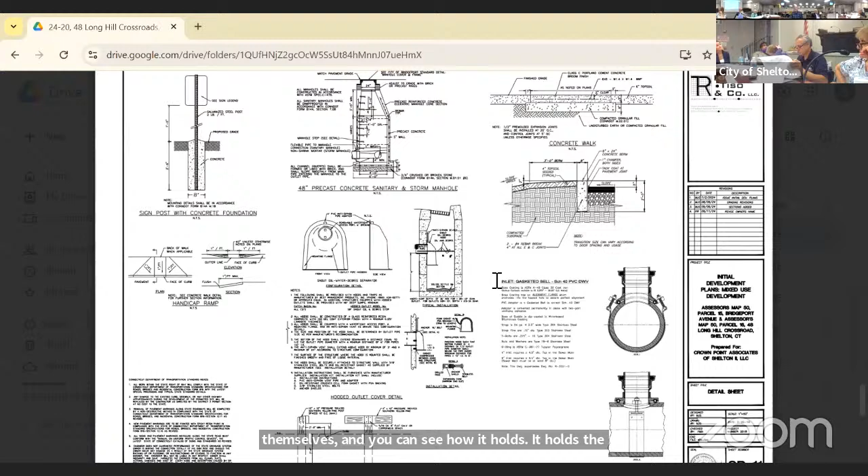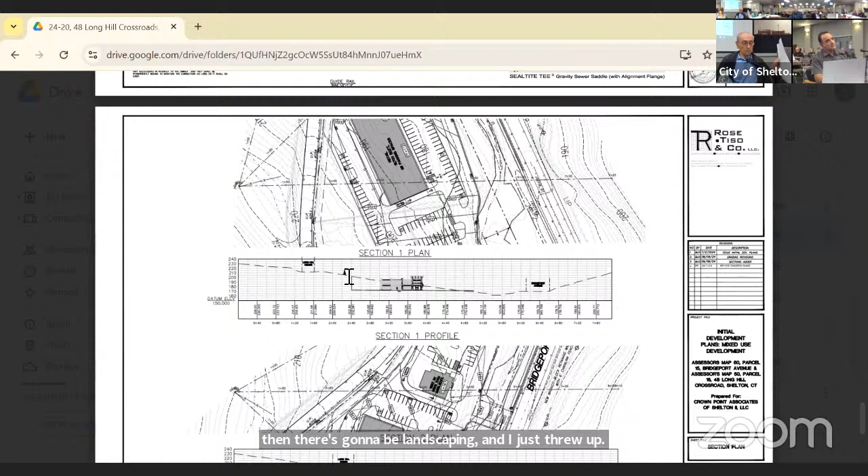On the Hawks Ridge side, there's going to be landscaping, and I just put in the 10-foot arborvitae there as it would go in today. Obviously it would be 4 times that height eventually, and then you can see the only thing they'd see is the top of the retail building.

If you have the 40-foot hedge, like you guys said, or if you have this as open space that's fully grown, then you don't see anything.

Again, here's the same view, but looking at - I believe that's the Dairy Queen, right? Yeah, no, that's just a regular restaurant with a drive-thru. We don't know what it is yet.

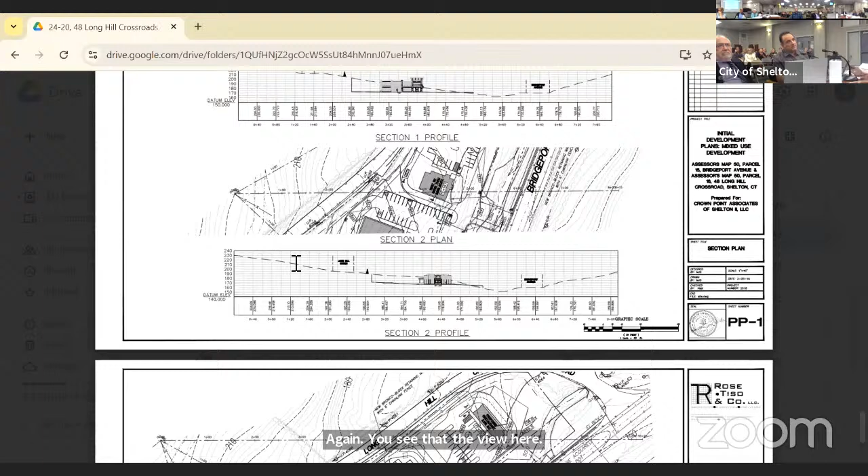Again, you see the view here - if we clear cut everything on Hawks Ridge and clear cut everything on our site, you're just seeing the very top of the roof. And there's Bridgeport Avenue here.

And then there's the site across the street that's going to be developed right there. So you see there's a retaining wall that's kind of shielding the property anyway, and then there's a small retaining wall here near the brook.

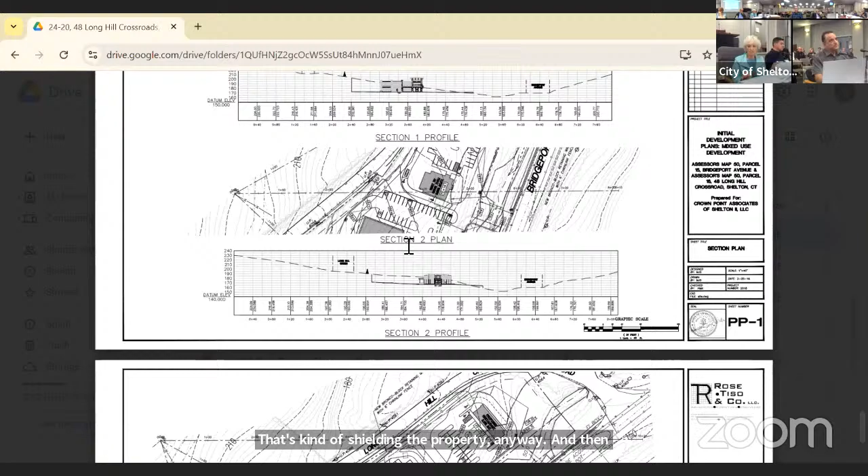And then this is the Dairy Queen here. Again, you're looking down Long Hill Crossroads, which has a lot of trees here. There's a retention pond here now. You're going to look across Long Hill Crossroads, and then you would see a little more of this building.

But again, that's a long way - it's over 600 feet away, and there's a lot of trees here on the Hawks Ridge site that would shield this property or shield this building.

And then we'll have an arborvitae hedge here again, which will grow in. This is just a 10-foot version, because that's what it would be when we put it in today, but in 5 years it would be that tall. But again, there's a lot of trees in here, so there's no way they're seeing this Dairy Queen on the end, 600 and something feet away.

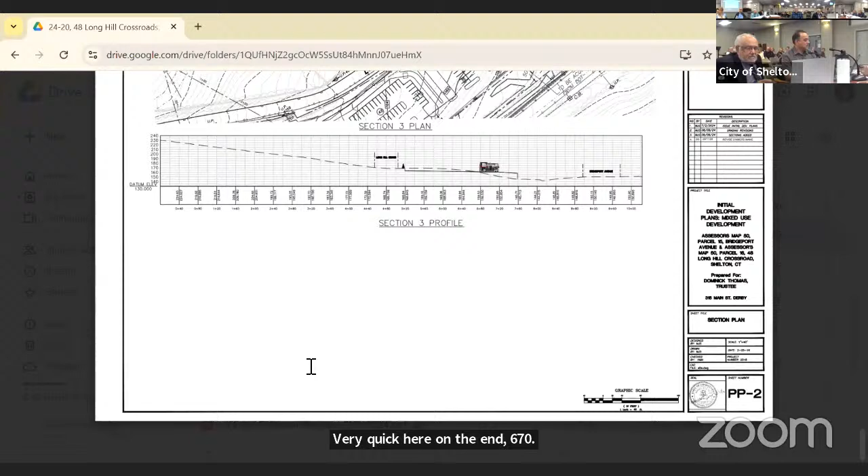That's my presentation. If there are any questions - any commissioners have any questions for Mr. Silva? Any questions for Mr. Rose?

Okay, right, anything else, Attorney Thomas, you want to present before we go to the public? Floor plans? Because we know it's going to come up, if you want the floor plans we can go into that, but we can reserve that for a different time.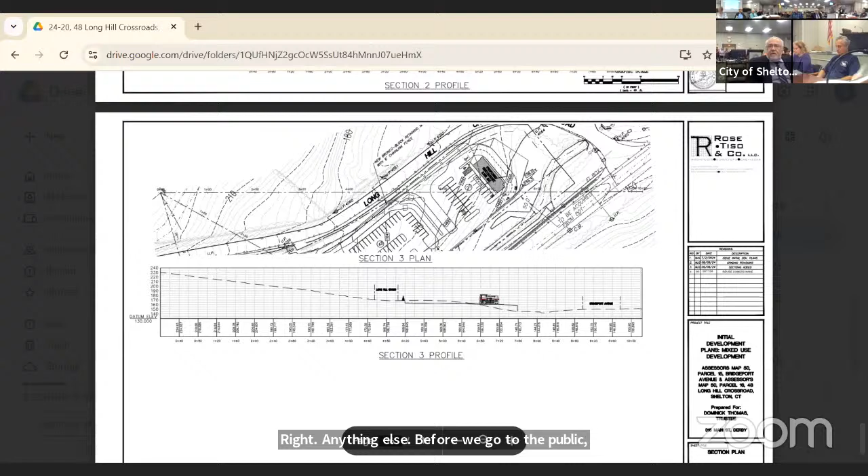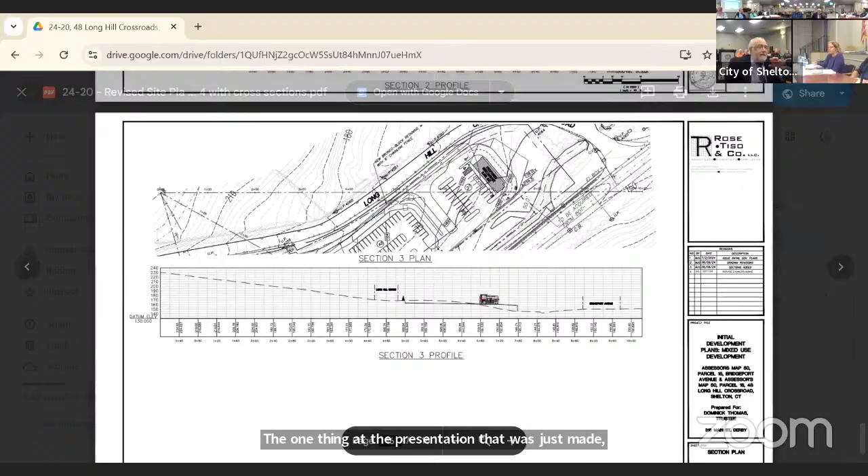The one thing, based on the presentation that was just made, that I did want to point out is that this is zone LIP. So if you had two lots, not a lot, but two LIP buildings, there would be no landscape, no buffer, other than the natural buffer that's there.

I do want to hear from the public, but just one question on the site plan, or on the floor plans, A101 of the retail building. I'm wondering, these tenant spaces, these long narrow tenant spaces, is this exactly what would be built, or would you build it to spec if a retail tenant wanted flex space? They just all seem very long and narrow, these different retail spaces.

What it is, Commissioner, is that you're making an assumption that you can break it down into these small spaces. That's how you develop a structural system for it. What'll happen is somebody will take two or three retail tenant spaces, depending on the size of their store, and then those walls won't be there. It's purely showing what the smallest spaces would be.

Okay, one of the things before we go to the public portion, I just wanted to bring out, I think it might be a good idea, because as many times as we have driven up and down Bridgeport Avenue, to do a site visit. I would like to ask Attorney Thomas to work with staff, set that up, and come up with some feasible way, whether from the adjacent property on Bridgeport Avenue, from up on Long Hill Crossroads, or from that parking lot.